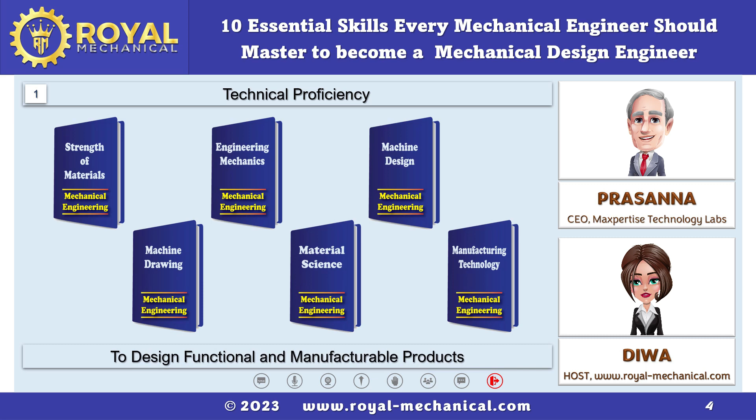Let me tell you, the list of topics is not extensive, but a mechanical engineer should be proficient in at least these subjects to start with. Technical proficiency enables mechanical engineers to design functional and manufacturable products.

The second essential skill mechanical engineers should master is CAD, computer-aided design. A mechanical engineer should be proficient in at least one CAD software's part design, sheet metal design, assembly design, and drafting modules. Sir, mechanical engineers also learn CAD in their colleges as part of their academics.

Yes, Diwa, you are right. Mechanical engineers should be highly proficient in not just creating designs and drawings. They should also be skilled in modifying designs and drawings.

The third essential skill mechanical engineers should master is GD&T, geometric dimensioning and tolerancing. I am sure all mechanical engineers are aware of the 14 GD&T symbols. There are many benefits of GD&T in mechanical product design. One of the top benefits is interchangeability.

Interchangeability is the replacement of parts. Let's imagine you want to replace the wheel of your car or bike. It's effortless to replace. This interchangeability is possible with the implementation of GD&T in designs.

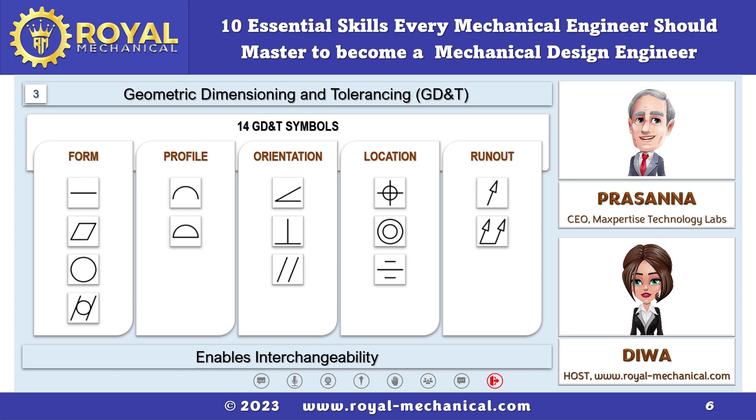The fourth essential skill mechanical engineers should master is materials and manufacturing process. I am sure all mechanical engineers are aware of materials and manufacturing processes. Manufacturing is the transformation of raw material into the finished product.

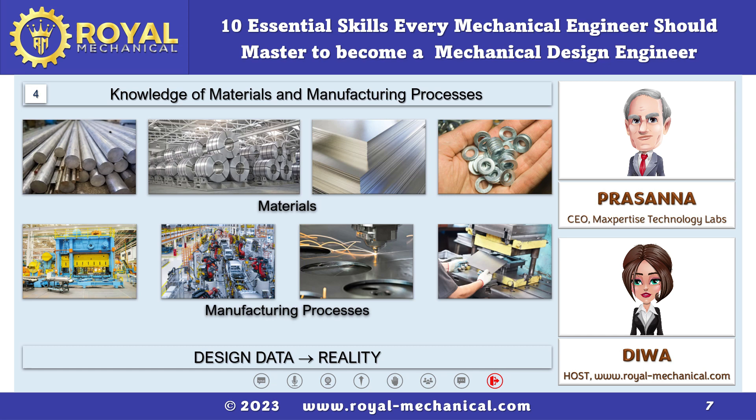Let's take an example of a washer. A mechanical engineer can design the washer using CAD software. But eventually, the washer has to be manufactured from raw materials and manufacturing processes. Hence, the knowledge of materials and manufacturing processes is crucial to becoming a mechanical design engineer.

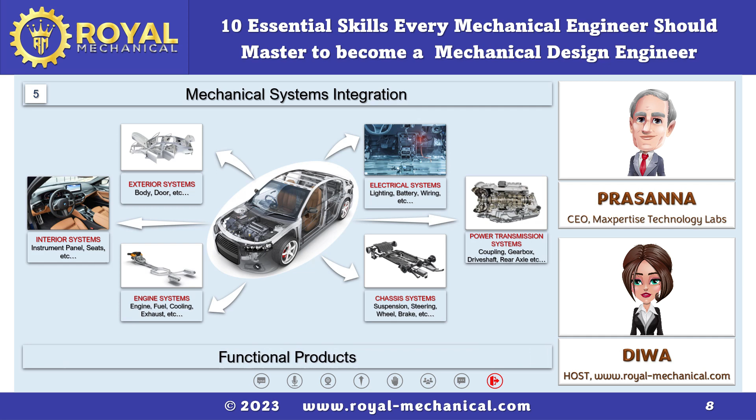Mechanical systems integration is the fifth essential skill mechanical engineers should master. Again, let's take the example of the car. The car has many systems: electrical systems, power transmission, chassis, engine, interior, exterior, and many other systems. Only when all these systems get integrated we have a functional car. Hence, mechanical design engineers should master systems integration.

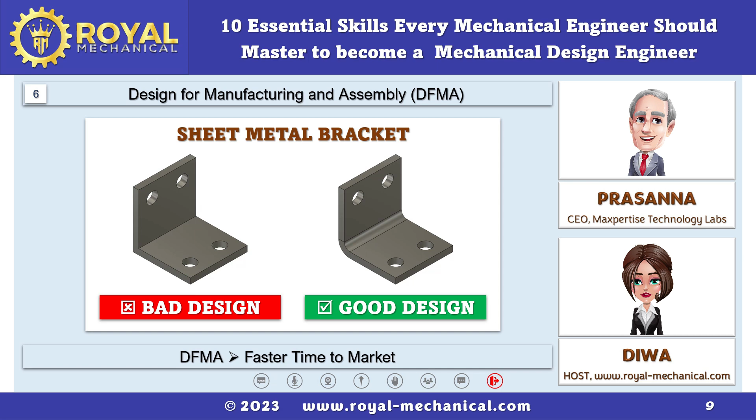The sixth essential skill mechanical engineers should master is DFMA, design for manufacturing and assembly. The simplest example is the sheet metal bracket. The sheet metal bracket on the left side is a bad design, and the one on the right is a good design. Designs that can't be manufactured or that are impossible to manufacture will create unnecessary delays in manufacturing. However, with the effective implementation of DFMA principles, the products can be manufactured and launched quickly to market.

The seventh essential skill mechanical engineers should master is the knowledge of codes, standards, and regulations. The internationally accepted standard for GD&T is ASME Y14.5. Mechanical engineers should learn to apply GD&T as per ASME Y14.5. In addition, ISO 9001 is an international standard specifying an organization's quality management system requirements. Mechanical engineers should also know this standard.

I am giving only 2 examples. Mechanical engineers should know all the codes, standards, and regulations specific to their industry. Implementing codes, standards, and regulations in designs will ensure customer satisfaction due to improved product quality and benefit the company for which mechanical engineers work.

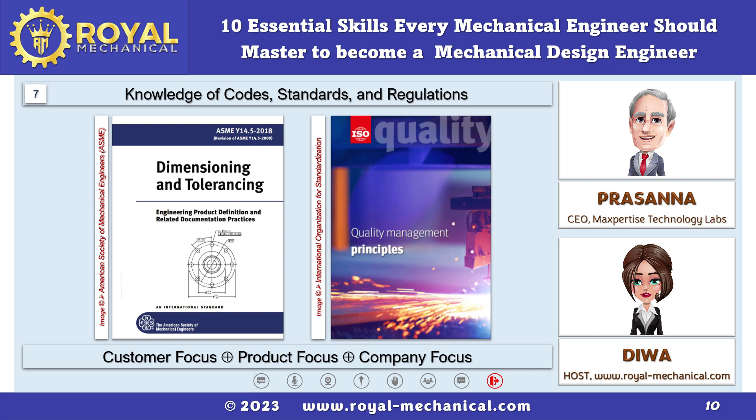Effective communication and collaboration are the 8th essential skills mechanical engineers should master. I am sure each mechanical engineer knows the importance of effective communication and collaboration. Hundreds of engineers must communicate and collaborate effectively to design and develop products like cars and aircraft.

Mechanical design engineers in an organization will have to communicate with customers, colleagues, supervisors, and other departments like sales, marketing, manufacturing, procurement, and support functions like HR, admin, IT, and finance. Effective communication and collaboration are critical for teamwork.

But at the same time, they should be capable of resolving any problems. Continuous learning and adaptability are the 10th essential skill mechanical engineers should master. The essential skills we discussed can get career success for mechanical engineers, but to sustain success, mechanical engineers should continuously learn, upgrade their skills and knowledge, stay relevant, and achieve tremendous career success.

So these were the 10 essential skills every mechanical engineer should master to become a mechanical design engineer. Thanks, sir. Please tell us how to get a mechanical design engineer's job.

Sure, Diwa. I will explain a step-by-step process to getting a mechanical design engineer's job in 24 weeks. Sir, 24 weeks is 6 months, that's a long time to get a job. No, 6 months is short if a mechanical engineer lacks skills. But suppose a mechanical engineer has mastered the essential skills required to be a design engineer, in that case they can get a job in no time.

Target 24 is a skill development program to provide mechanical engineers with relevant technical skills and experience to become mechanical design engineers in 24 weeks.

Before I explain Target 24, let's recap who gets the job. First, let me tell you a mechanical engineer with relevant skills, experience, and good communication skills will always get jobs. To summarize, a competent mechanical engineer always gets jobs. The question is how mechanical engineers can acquire relevant skills, experience, and good communication skills.

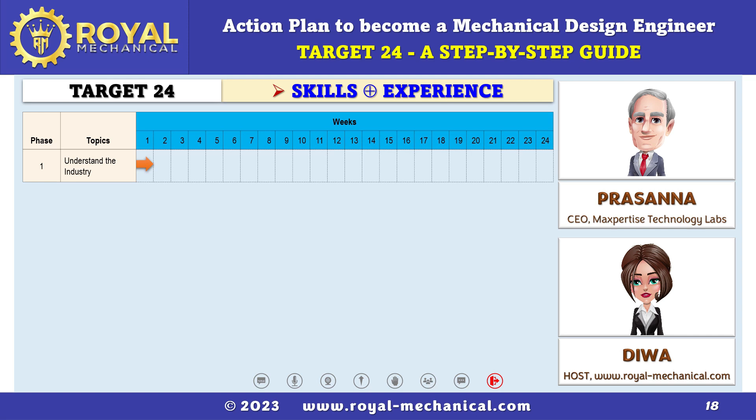Now let me explain Target 24, the step-by-step guide to providing relevant skills and experience to mechanical engineers. In Phase 1, mechanical engineers will learn about the industry. In this phase, we will find answers to questions like where can mechanical engineers find jobs? What is the manufacturing industry? How are cars made? What is meant by Tier 1, Tier 2, and Tier 3 companies? What is OEM? What is the engineering services industry? And many more other questions.

In the second phase, mechanical engineers will practice CAD. They will learn how to create parts, assemblies, and manufacturing drawings of real-life products. In addition to CAD, mechanical engineers will learn the manufacturing process to manufacture these real-life products. They will also identify design for manufacturing concepts. This phase is not just about learning CAD commands. Mechanical engineers will learn to design with CAD in 2 months.

The third phase is to create product and tooling designs with the application of GD&T. This phase is project-oriented. Mechanical engineers will design 2 to 3 products and 2 to 3 tooling. In addition to designing products and tooling, mechanical engineers will learn to create manufacturing drawings, project reports, and presentations in 2 months. As a result, mechanical engineers gain experience working on real-time projects.

In the last phase, mechanical engineers will learn to prepare an effective resume, cover letter, and also prepare for job interviews. A resume and cover letter are documents that get a job interview call, and interviews are gateways for jobs. So preparing for a job interview is critical in getting jobs. In addition, mechanical engineers will have to prepare for technical and general interview questions.

Then mechanical engineers will learn to create profiles on several job portals, search and apply for relevant jobs by customizing resumes and cover letters, then attend and succeed in the job interview. I anticipate this phase will get over in 2 months. Overall, 6 months of skill development for mechanical engineers focusing on understanding the industry, CAD, manufacturing processes, DFMA, GD&T, product design, tooling design, resume, cover letter, and interview preparation.

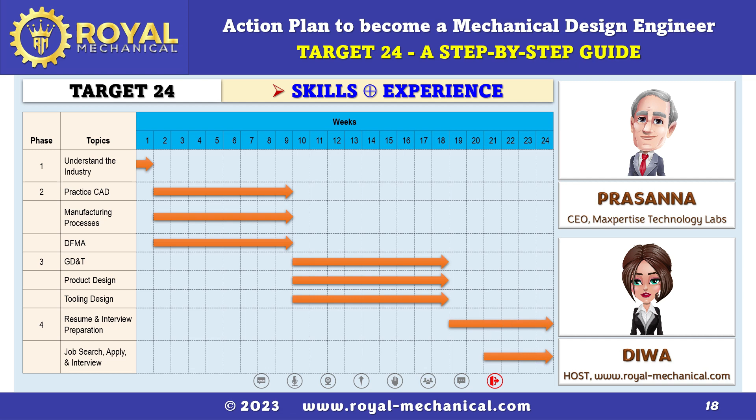Sir, this is a comprehensive approach to getting jobs. How about Converse 24? Like Target 24, Converse 24 is a 24-week skill development program for mechanical engineers to improve their communication skills. Converse 24 has monthly themes.

First month, mechanical engineers will practice formal and informal conversations in the office with colleagues, supervisors, and other department colleagues like HR, admin, etc. In the second month, mechanical engineers will practice business-related conversations, especially with the sales and marketing teams. In the third month, they will practice conversations related to project initiation, planning, scheduling, monitoring, controlling, and closing projects. In the fourth month, mechanical engineers will practice conversations with customers.

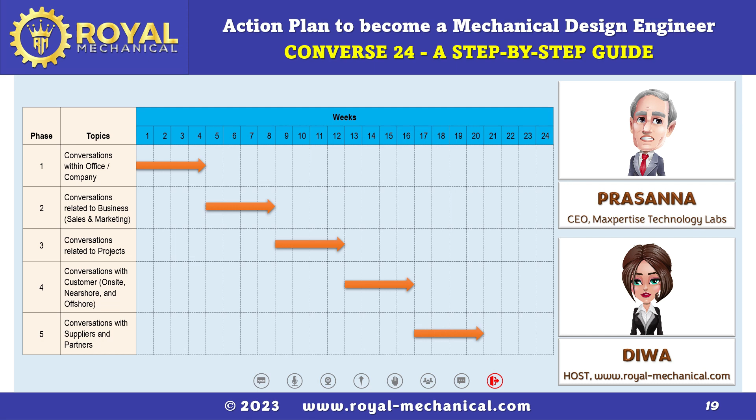Mechanical engineers will practice conversations with suppliers and partners in the fifth month. In the sixth month, they will practice conversations related to job interviews, not only attending job interviews but also conducting job interviews. Overall, in 6 months, mechanical engineers will practice every business-related conversation.

Sir, is this training in business English? Not exactly. Converse 24 trains mechanical engineers in simple English conversations in a business environment. I am confident mechanical engineers can get good jobs once trained as per Target 24 and Converse 24.

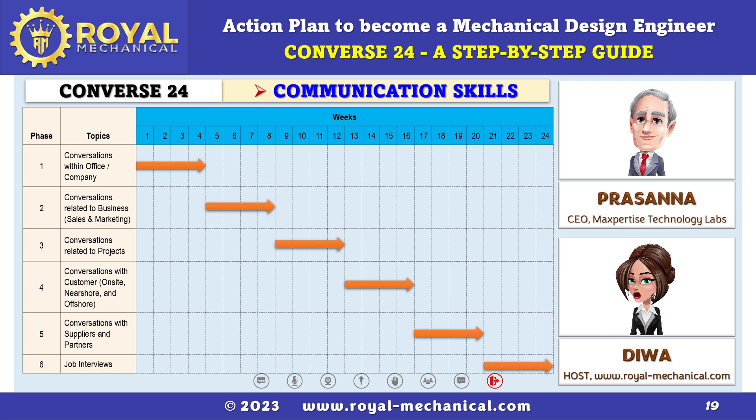Thanks, sir. I observed both Target 24 and Converse 24 offer career success skills for mechanical engineers. We will continue this series on our YouTube channel and website, Royal Mechanical. In our next video, we will understand the industry.

We will find answers to questions like, where can mechanical engineers find jobs? What is the manufacturing industry? How are cars made? What is meant by Tier 1, Tier 2, and Tier 3 companies? What is OEM? What is the engineering services industry? And many more other questions.